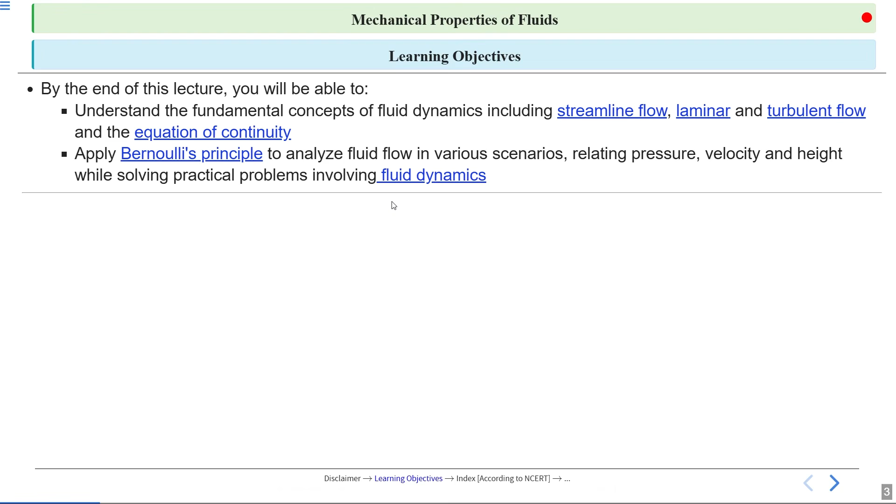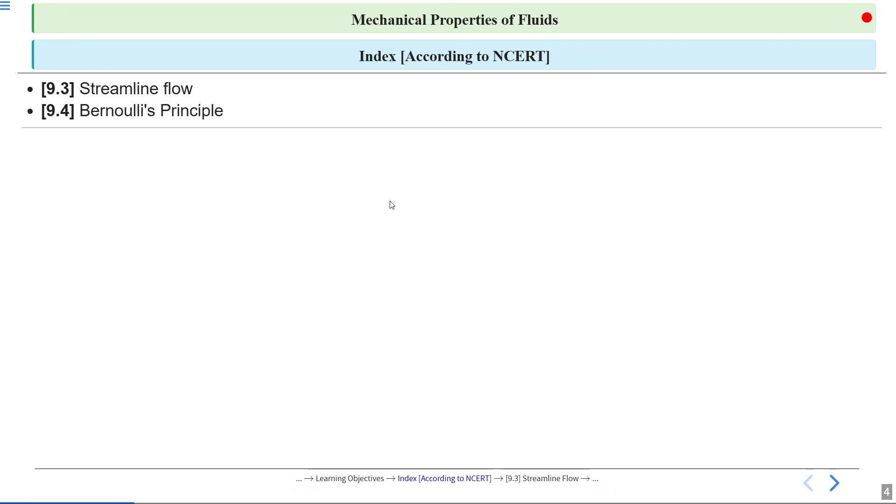In today's lecture, we are going to cover section 9.3 streamline flow, then 9.4 Bernoulli's principle. So let's start.

Now we will try to understand the principles and behavior of steady fluid flow patterns. This means we will be exploring how fluids like water and air move when their flow is smooth and constant over time. Keep in mind, steady means the properties at any given point in the fluid do not change as time passes.

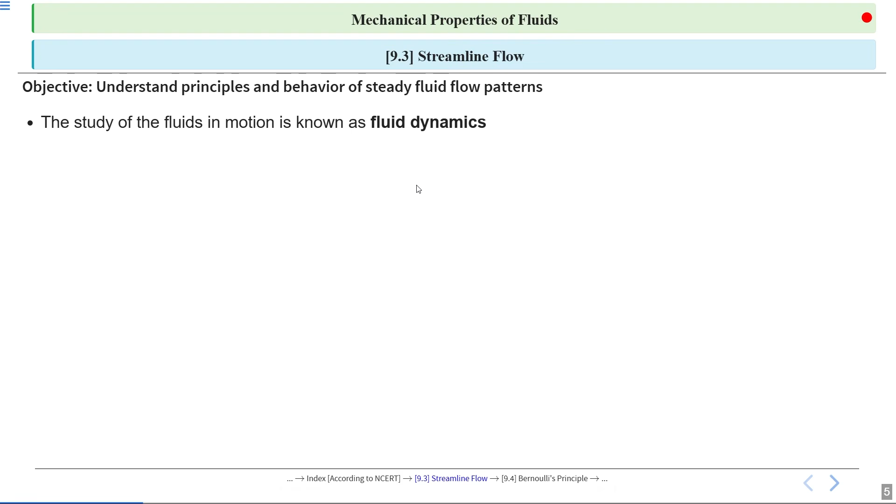The study of fluids in motion is called fluid dynamics. This is different from fluid statics, which deals with fluids at rest. Fluid dynamics helps us analyze how liquids and gases move and interact with their surroundings. It governs everything from blood flow in our circulatory systems to the flight of aircraft. These are just two examples, but fluid dynamics is essential in many areas of science and engineering.

Now, take a moment to look at the historical development of fluid dynamics. Understanding where these ideas come from helps us appreciate how the field has evolved over time. The mathematical foundation of fluid dynamics was first established by Leonard Euler, who created equations to describe fluid motion.

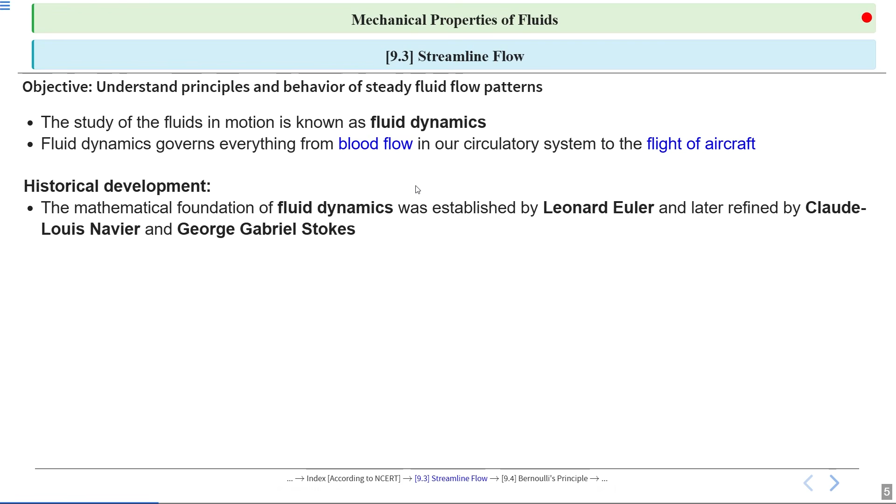Later, Claude Louis Navier and George Gabriel Stokes refined these ideas, leading to the Navier-Stokes equations, which are still used today to predict how fluids behave in different situations. The work of Euler, Navier and Stokes provides the mathematical tools we use to understand and predict fluid motion. These equations are fundamental in physics and engineering, helping us solve real-world problems involving fluids.

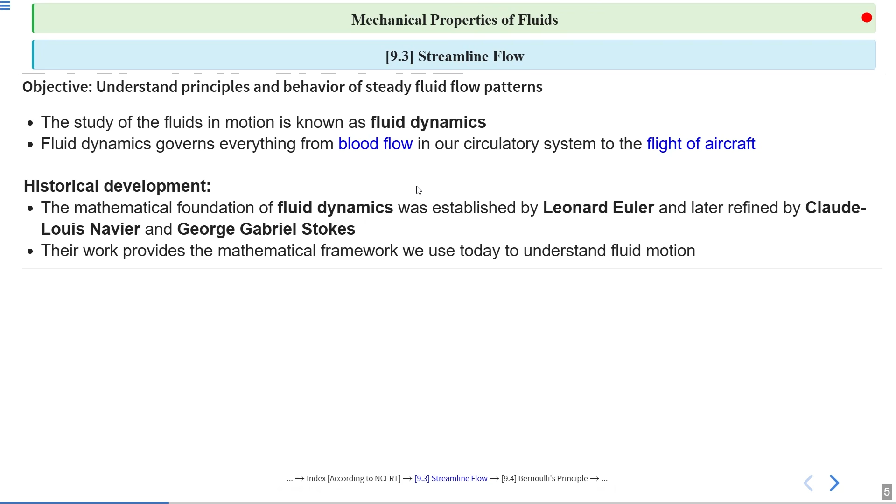Now let's define steady flow. In steady flow, the velocity of each fluid particle passing through a given point remains constant over time. That means if you watch a particular spot in the fluid, the speed and direction of the fluid at that spot don't change as time passes.

Look at the figure: fluid particles move with respect to time, and their velocity at point A is v1, velocity at point B is v2. The figure shows fluid particles moving smoothly, and each one follows a predictable path. This is what we mean by steady flow.

However, steady flow does not mean that the velocity is the same everywhere in the fluid. Different points in the fluid can have different velocities. For example, fluid might move faster in the center of a pipe and slower near the edges. The important thing is that at each specific point, the velocity stays constant over time, even if it's different from other points.

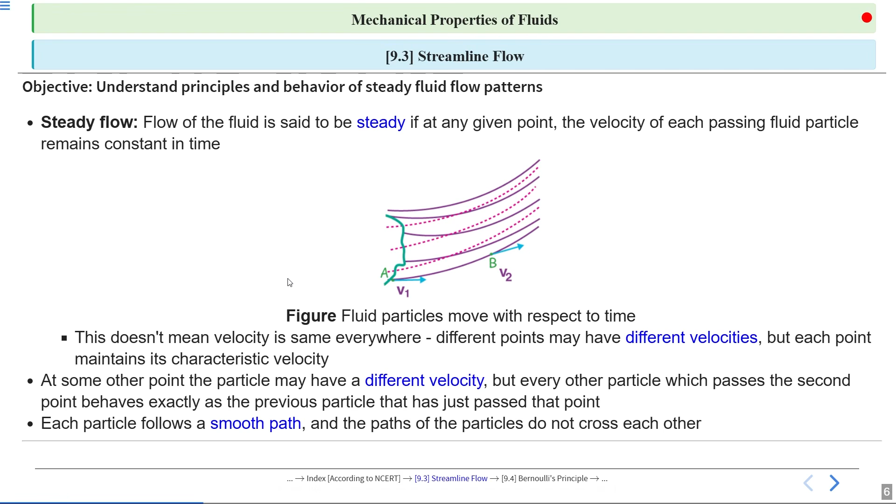Now, let's introduce the concept of a streamline. A streamline is simply the path that a fluid particle follows as it moves. At any point along this path, the direction of the streamline matches the direction of the fluid's velocity. This means if you draw a tangent to the curve at any point, it shows you exactly where the fluid is heading at that moment.

Look at the figure here. It shows two things: figure 9.7a, a typical trajectory of a fluid particle, and B, a region of streamline flow. The first is the actual path a single fluid particle might take, and the second is a region where many streamlines are drawn to represent the overall flow. From this figure 9.7, we can say streamlines never cross each other. This is because at any given point, the fluid can only have one direction of motion.

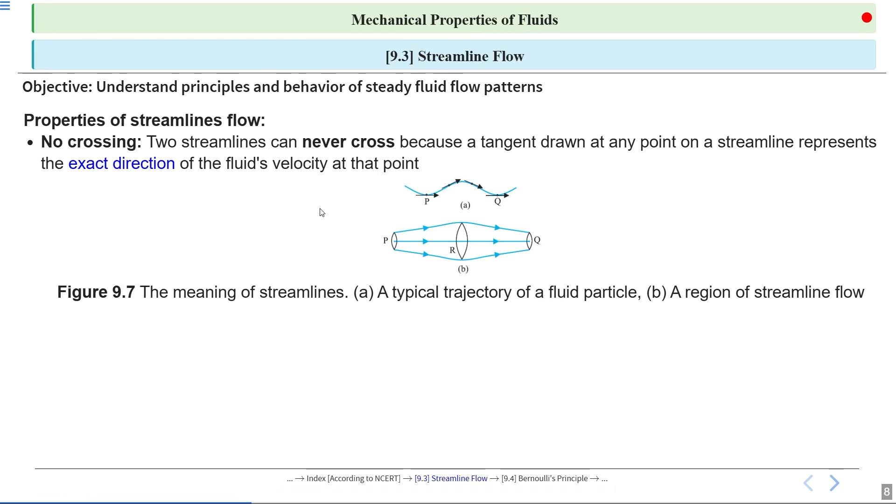At any point along a streamline, the direction of the fluid's velocity is exactly along the tangent to that line. Look at figure A: at point P, if you want to find out the direction, draw the tangent there. Similarly at point Q. So figure 9.7 shows how streamlines represent the direction of flow at every point.

So here fluids flow orderly. If two streamlines were to intersect, what would happen? It would mean that at that single point, the fluid would have two different directions of velocity at the same time.

So if we talk about point P, suppose at point P two streamlines cross. Then at that point the direction of velocity would be two at the same time. That's physically impossible, so we can say two streamlines never cross each other.

At that point, having two directions of velocity at the same time is physically impossible for a fluid, because at any instant a particle can only move in one direction. So streamlines never cross. I hope this is clear.

Another important property is the density of streamlines. The density of streamlines tells us about the speed of the fluid. Where streamlines are close together, the fluid is moving faster. Where they are further apart, the fluid is moving slower. For example, around the narrow part of a river, water flows faster because the streamlines are packed tightly together.

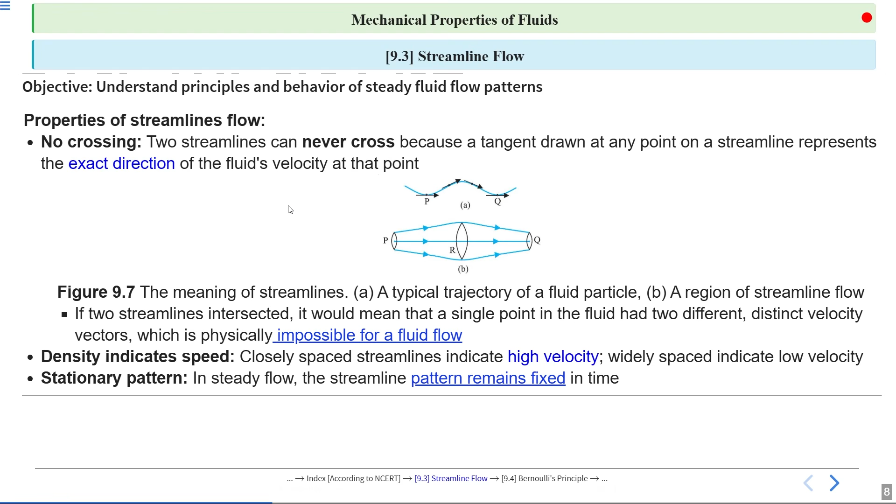Now let's talk about an important equation called the equation of continuity. Here we will learn the equation of continuity.

Consider a fluid flowing through a pipe of varying cross section. Look at the figure. Varying cross section means the cross section is different at different points. At point P, the cross section is this one; at point R it changes; at point Q it changes again. Figure 9.7 shows fluid flowing through a pipe that changes in width.

Look at the streamlines. These lines show the path that fluid particles follow. In part A, you see a single particle path, and in part B, you see a region where the flow is smooth and steady, which we call streamline or laminar flow. I hope this is clear.

At different points along the pipe, labeled P, R, and Q, the pipe has different cross sectional areas, which we call AP, AR, and AQ. The fluid also moves at different speeds at these points, which we call VP, VR, and VQ respectively. Changes in area affect the speed of the fluid at each point.

Now consider fluid flowing through a pipe of varying cross section. So similarly, mass of fluid delta mr flowing or crossing at AR in a small interval of time delta t is rho r AR VR delta t.

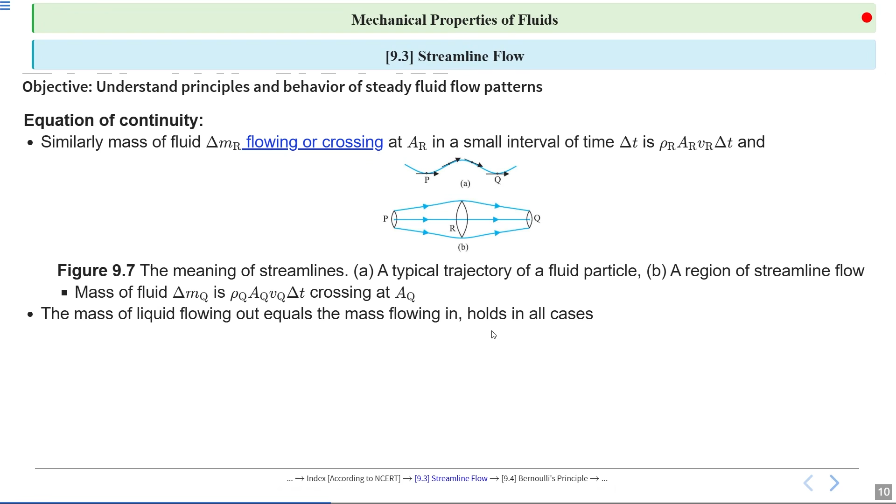And mass of fluid delta mq is rho q AQ VQ delta t crossing at AQ. The mass of liquid flowing out equals the mass flowing in, holds in all cases.

So putting it all together, we get the equation: rho p AP VP delta t is equal to rho r AR VR delta t is equal to rho q AQ VQ delta t. This equation is very important. Each term represents the mass of the fluid passing through different sections in the same time interval.

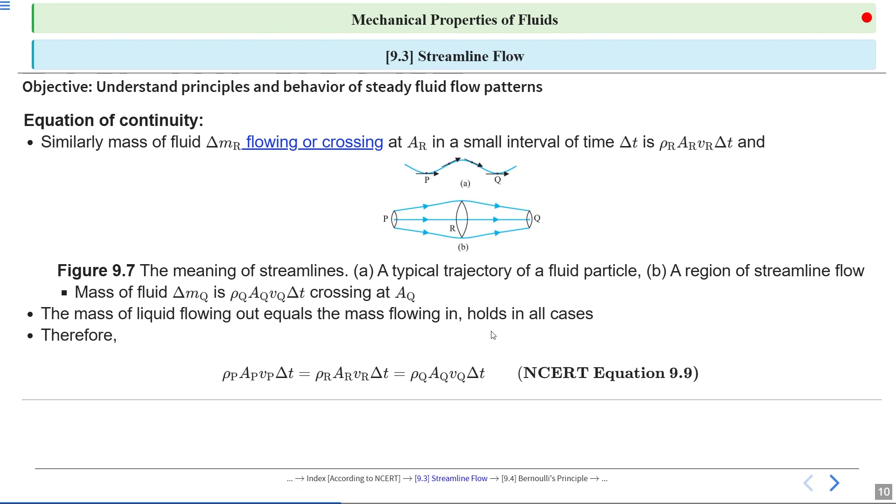Now let's look at what happens when a fluid is incompressible, meaning its density does not change as it flows. Here, the density at point P, point R, and point Q are equal: rho P equal to rho R equal to rho Q.

So equation 9.9 reduces to: rho p AP VP delta t is equal to rho r AR VR delta t is equal to rho q AQ VQ delta t. So the equation simplifies further to AP VP is equal to AR VR is equal to AQ VQ.

Here A stands for the cross sectional area in square meters, V is the velocity in meters per second. This means that the product of area and velocity is constant along the flow. So if the area decreases, the velocity increases and vice versa. This is the core idea behind the equation of continuity.

Now let's talk about incompressible fluids. An incompressible fluid is one where the density, which we call rho, stays constant as the fluid moves. Water is a good example of an incompressible fluid under most everyday conditions.

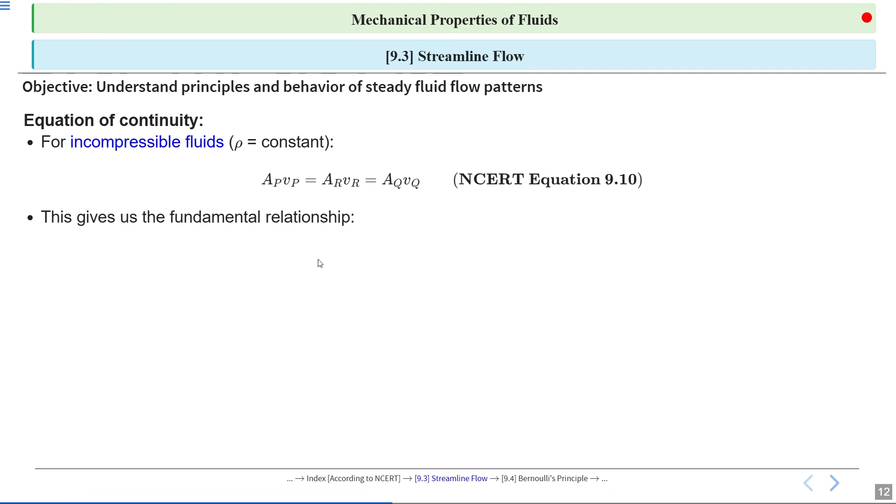So this leads us to a more general relationship: AV equal to constant.

Physical interpretation: when a fluid moves from a wide section to a narrow section, its speed increases. That's why, for example, water flows faster through the narrow part of a river and slows down in the wider parts. This is a direct consequence of the equation of continuity, and you can observe it in everyday life. So we know in narrow sections velocity increases, in wider sections velocity decreases, explaining why the water flows faster through the narrow part of a river and slower in wide sections.

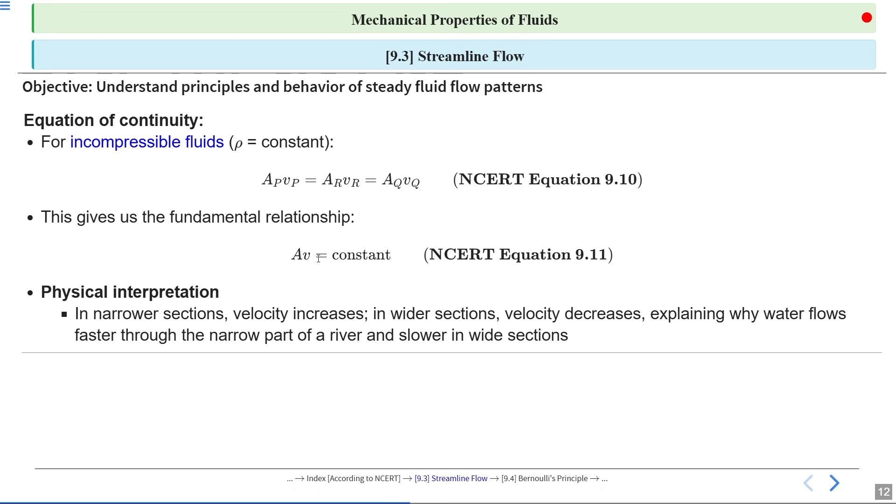It occurs at high velocities, low viscosities, and in the presence of disturbances or obstacles.

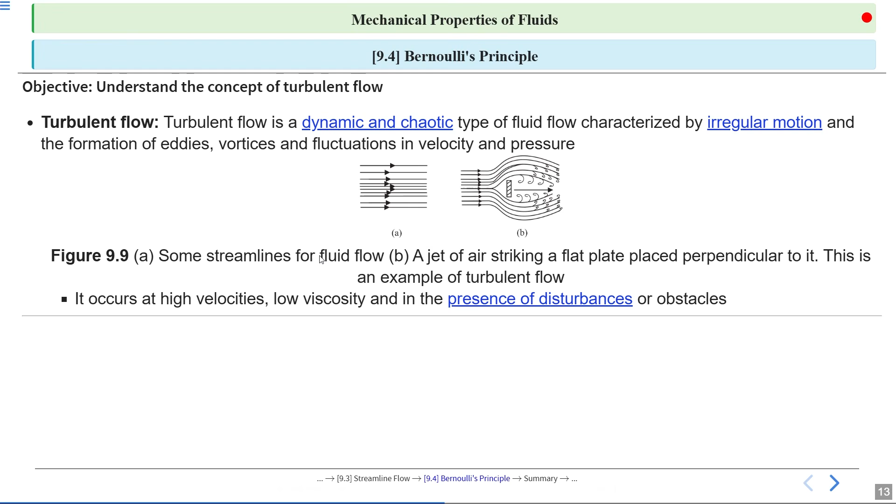Now let's define laminar flow. Laminar flow is a smooth and orderly movement of fluid where the particles move in parallel layers without much mixing between them. Look at the figure: here the streamlines are straight and don't cross each other. This is different from turbulent flow, where the movement is chaotic and the layers mix together.

The figure also shows a jet of air hitting a plate, which is an example of turbulent flow, not laminar flow. So in laminar flow, each particle of the fluid follows a predictable path, moving along well defined streamlines. This means if you were to track a single particle, you could easily predict where it would go next. It occurs at low velocities, high viscosities, and in the absence of obstructions.

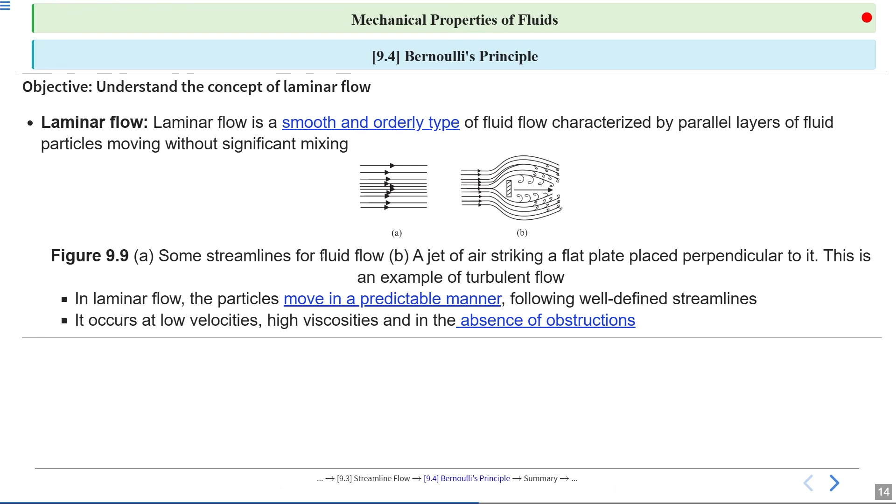Now we will learn Bernoulli's principle. Bernoulli's principle is one of the most elegant ways we apply the law of conservation of energy to fluids. It tells us that as a fluid moves, the total energy along a streamline remains constant as long as there is no friction or energy loss.

Bernoulli's principle was developed by Daniel Bernoulli in 1738. He found a fundamental relationship that links three important properties of fluid: its pressure, its velocity, and its elevation.

Now let's look at the historical context. Understanding where these ideas came from helps us appreciate their importance.

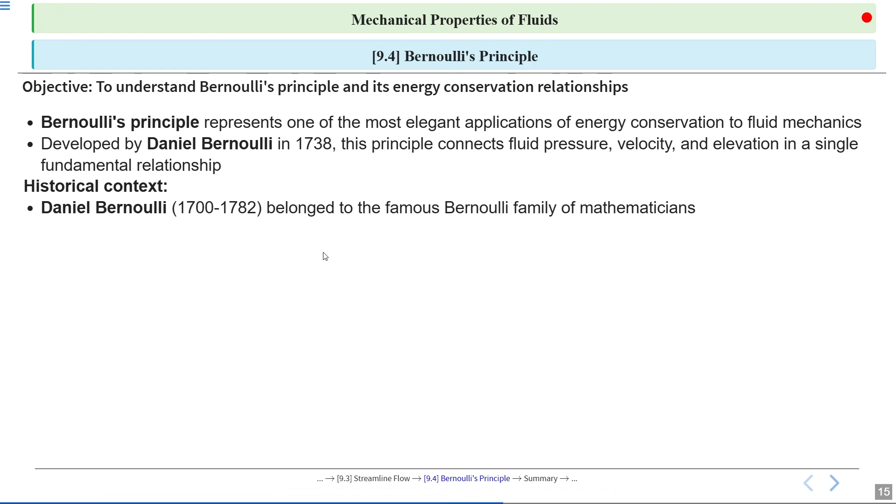Daniel Bernoulli was part of a famous family of mathematicians. He lived from 1700 to 1782 and made major contributions to mathematics and physics. His family legacy includes several important discoveries, but Daniel's work on fluids is specifically significant for us today.

In his book Hydrodynamica, Bernoulli introduced the idea that energy is conserved in fluid flow. This was a major step forward in physics as it connected the motion of fluids to the broader concept of energy conservation. Remember, this principle is foundational for much of what we study in fluid mechanics.

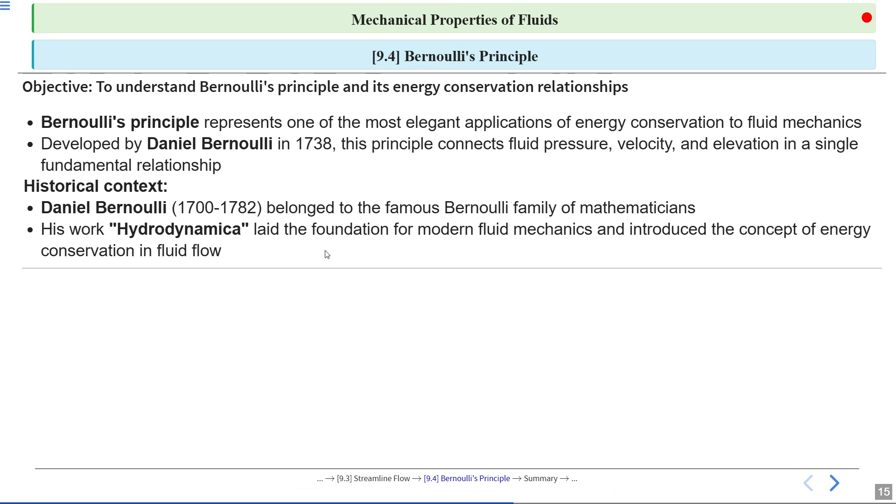Now first, let's talk about the physical foundation of Bernoulli's principle. It's important to know what assumptions and conditions we are working with before we dive into the details. We will focus on how fluids move and what factors affect their motion.

Consider a fluid moving in a pipe of varying cross-sectional area. This change in cross-sectional area affects the speed and pressure of the fluid at different points. Let the pipe be at varying heights as shown in figure 9.9. The figure shows how a section of fluid moves from one part of the pipe to another over a certain time. Both the area and the height change, which means both speed and gravitational potential energy will play a role.

Alright, so look at the figure. Height h1 at point one and height h2 at point two.

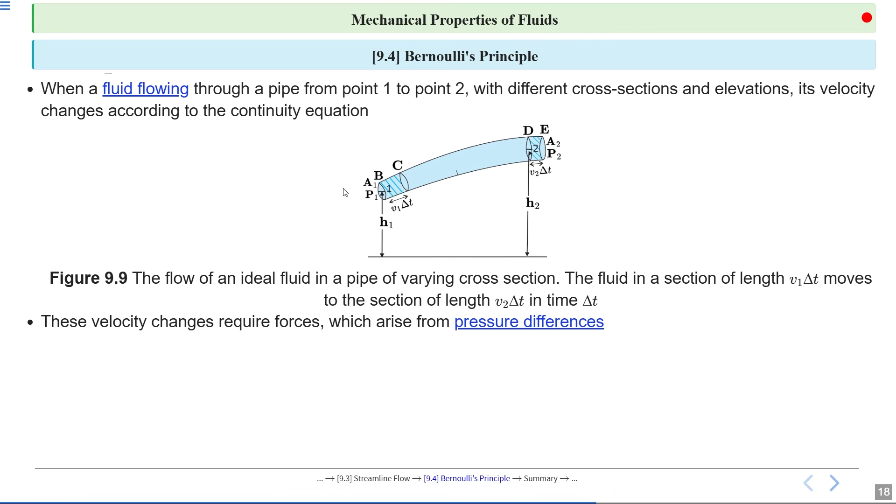So Bernoulli's equation quantifies these relationships using energy conservation. It tells us that as the fluid speed increases, its pressure decreases, and vice versa.

Now, work energy analysis. In time delta t, fluid moves distance v1 delta t at point first and v2 delta t at point second. The figure here shows how the fluid travels through sections of different sizes.

Work done by the pressure forces at point first, W1 equals P1 A1 into V1 into delta T, which is equal to P1 into delta V. At point 2, W2 equals minus P2 A2 into V2 into delta T, which is equal to minus P2 delta V.

If we add up the work done at both ends, the total work done on the fluid is the difference between the work at point first and point second. This total work is what actually changes the energy of the fluid as it moves through the pipe. So putting it all together, the total work done is W equals P1 minus P2 into delta V. This formula tells us that the net work depends on the difference in pressure and the volume of fluid moved.

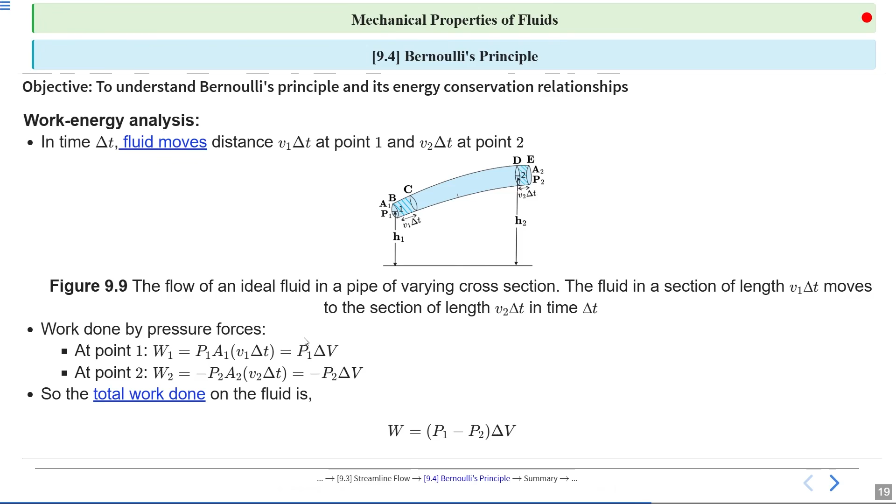Now, if the density of the fluid is rho and the mass passing through the pipe in time delta t is delta m, equal to rho A1 V1 into delta t, which is equal to rho into delta v. Change in gravitational potential energy is delta u equals rho g into delta v into h2 minus h1.

Change in kinetic energy, which is the energy due to the fluid's motion: delta KE equals 1 by 2 rho into delta v, times v2 square minus v1 square.

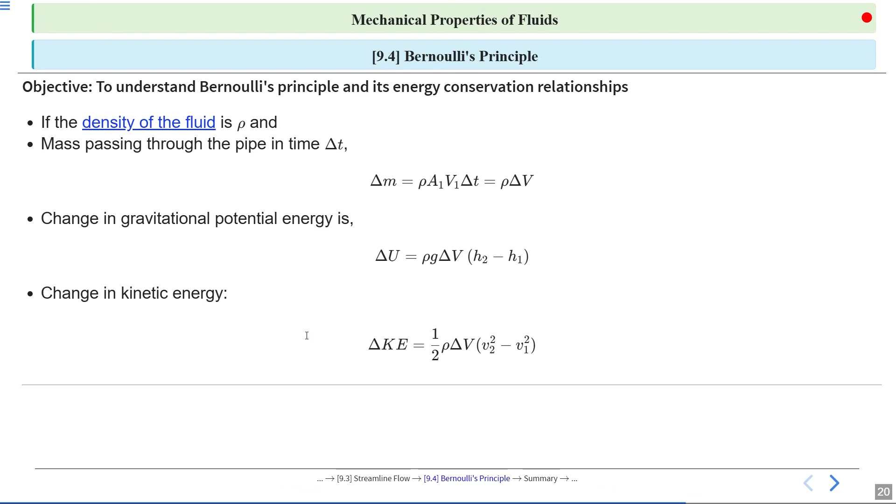Applying the work energy theorem: this states that the work done on a system equals the change in its kinetic energy plus the change in its potential energy. So W equals delta KE plus delta PE. Thus, P1 minus P2 into delta V equals 1 by 2 rho into delta V into V2 square minus V1 square, plus rho G into delta V into H2 minus H1.

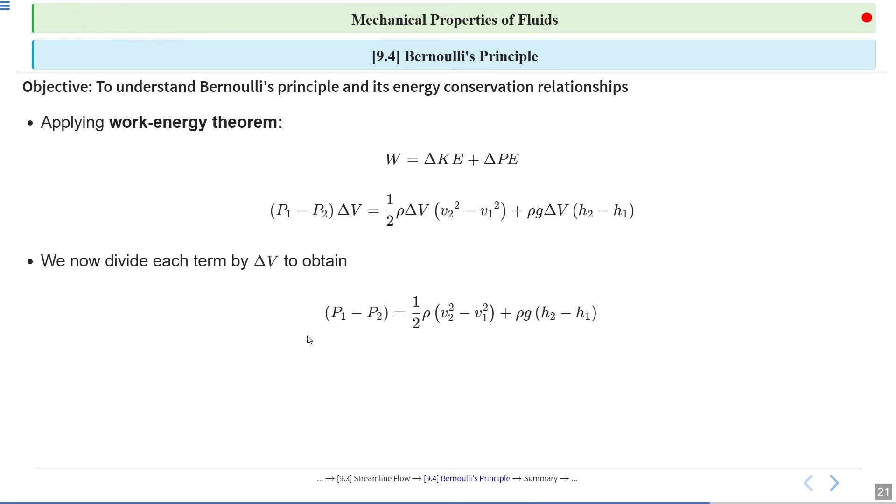We now divide each term by delta V to obtain: P1 minus P2 equals 1 by 2 rho into V2 square minus V1 square, plus rho G into H2 minus H1. We can rearrange these terms to obtain P1 plus 1 by 2 rho V1 square plus rho G H1 equals P2 plus 1 by 2 rho V2 square plus rho G H2.

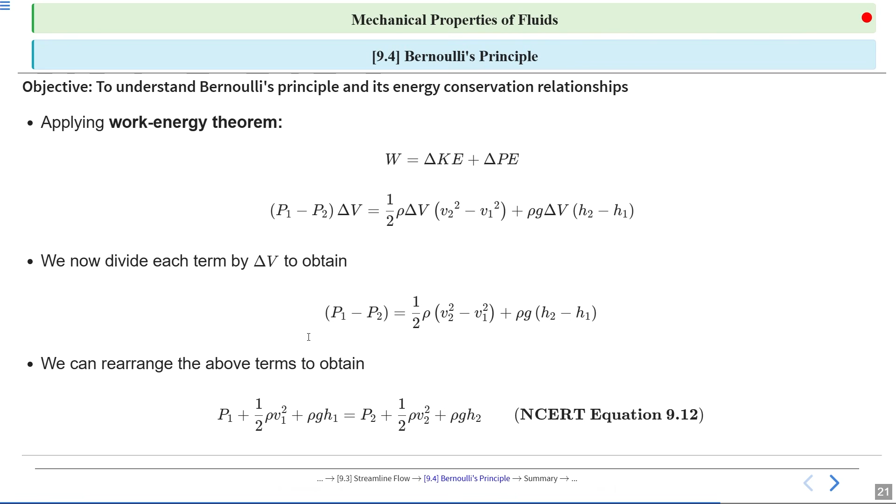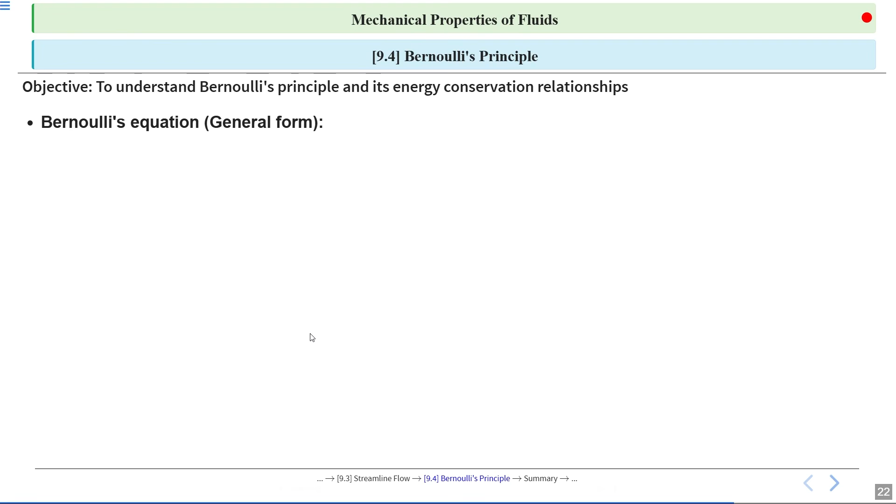Now, Bernoulli's equation general form. This equation is fundamental in fluid dynamics and connects the pressure, speed, and heights of a moving fluid. It's named after Daniel Bernoulli. This relationship only holds for steady, incompressible, and non-viscous flows. So P plus 1 by 2 rho V square plus rho GH equals constant.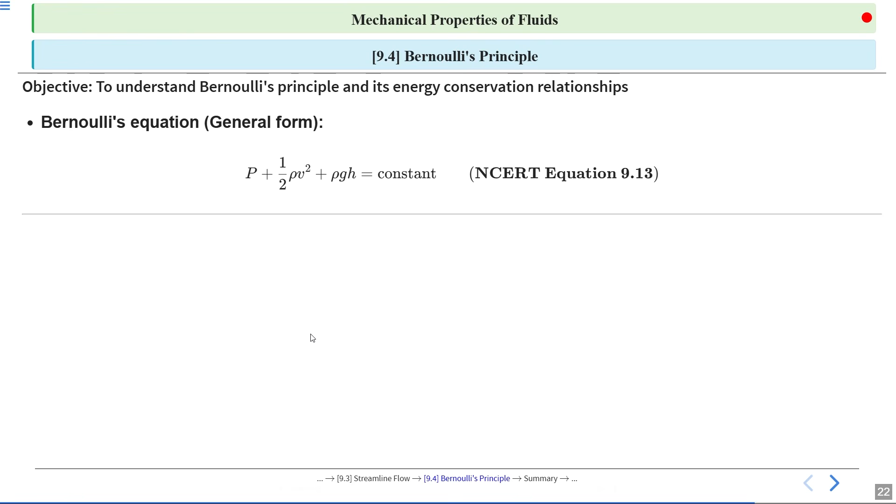Now let's summarize what we have studied so far in this section lecture. Fluid dynamics studies fluid in motion, with foundations laid by Euler, Navier, and Stokes.

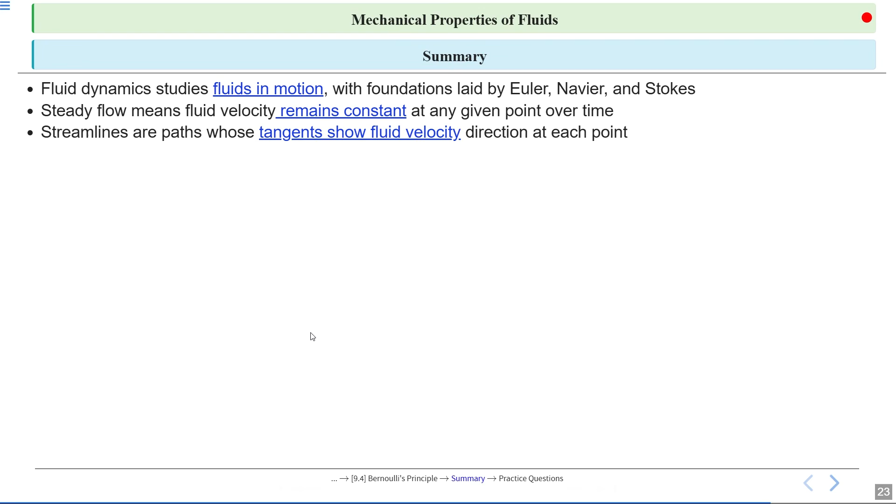Steady flow means fluid velocity remains constant at any given point over time. Streamlines are paths whose tangents show fluid velocity direction at each point. Streamlines never cross each other, as it would imply two different velocities at the same point.

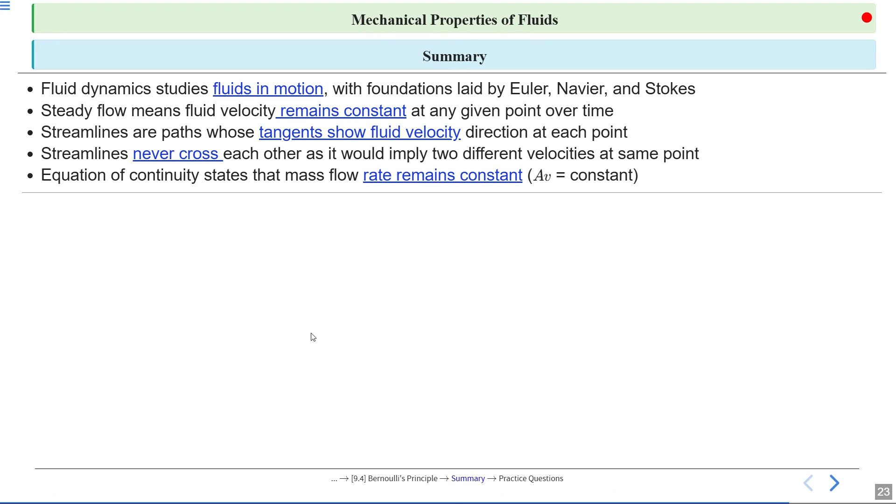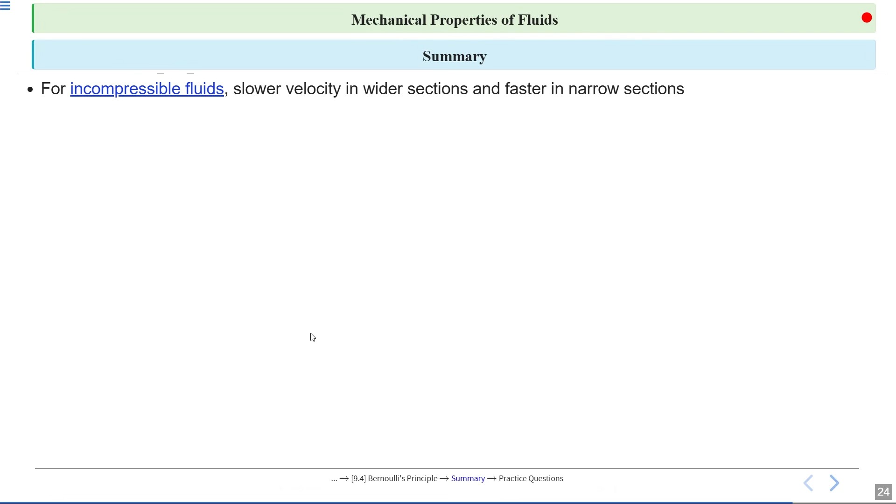Equation of continuity states that mass flow rate remains constant. For incompressible fluids, the velocity is slower in wider sections and faster in narrow sections.

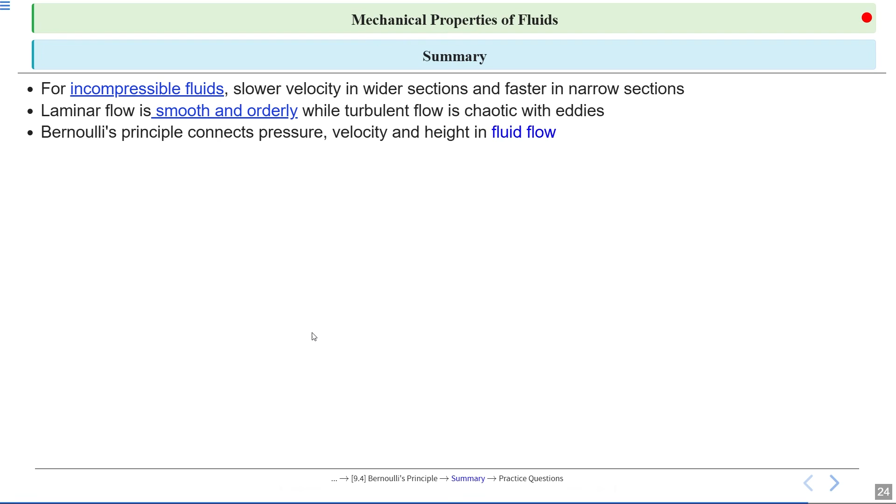Laminar flow is smooth and orderly, while turbulent flow is chaotic and erratic. Bernoulli's principle connects pressure, velocity, and height in a fluid flow. So Bernoulli's equation: P plus 1 by 2 rho V square plus rho GH equals constant.

Now we have some practice questions. First, water flows through a pipe that narrows from a diameter of 8 centimeters to 4 centimeters. If the velocity in the wider section is 3 meters per second, what is the velocity in the narrow section? So here you have to find out the velocity in the narrow section.

If water flows through a pipe with cross sectional area 30 centimeter square at a velocity of 4 meters per second, what is the volume flow rate in meter cube per second? So here you have to find out the volume flow rate.

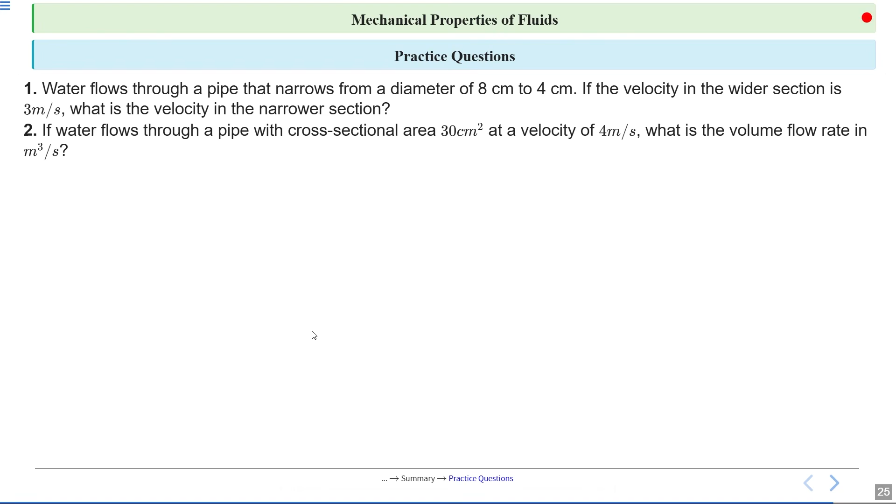Calculate the Reynolds number for water flowing through a pipe of diameter 2 centimeters with velocity 0.5 meter per second. Given water density 1000 kilogram per meter cube, viscosity 0.001 pascal second.

In a horizontal pipe, if the pressure at point A is 150 kilopascal and the velocity is 2 meters per second, what is the pressure at point B where the velocity is 6 meters per second?

Water flows through a vertical pipe that rises 3 meters. If the velocity at the bottom is 4 meters per second and pressure is 200 kilopascal, what is the pressure at the top if the velocity there is 2 meters per second? Use rho equal to 1000 kilogram per meter cube and g equal to 9.8 meter per second square. Alright, so these are the practice questions.

These questions build your concept and improve your problem solving skill. Thank you for your attention.